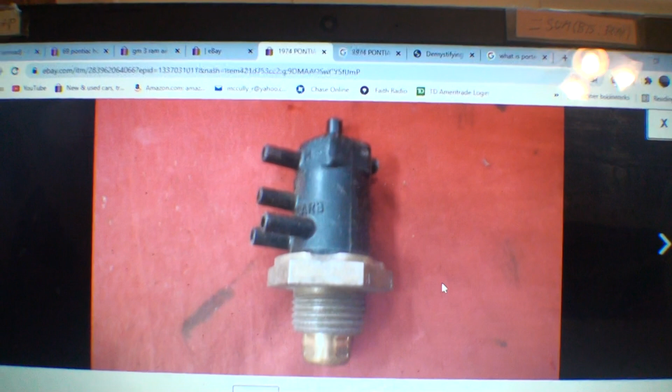Here's some more trivia. On the front of the early smog days, they had this valve right here on the front of the manifold, and it's got 4 ports. It works off vacuum, but there's also this part down here that will open and close depending on if the engine is warm or cold.

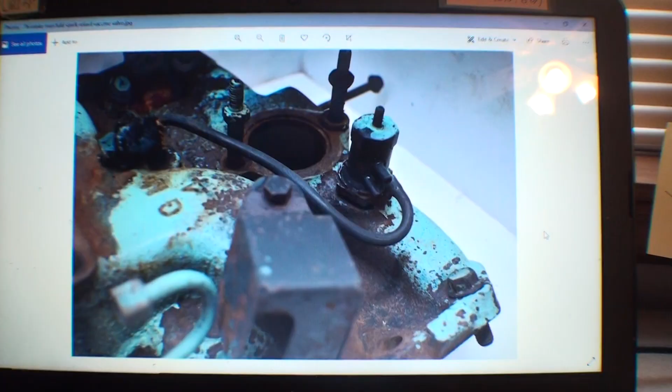Anyway, here's a picture of an old manifold I had. It's on my computer, and here's an instance of that valve.

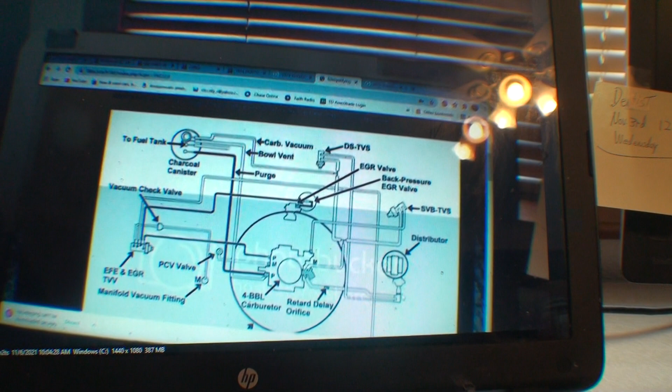I'm trying to explain to anybody that cares and put it together myself. This is shot over some time, but there's a lot of pieces, a lot of valves that are stuck into what I call smogger manifolds.

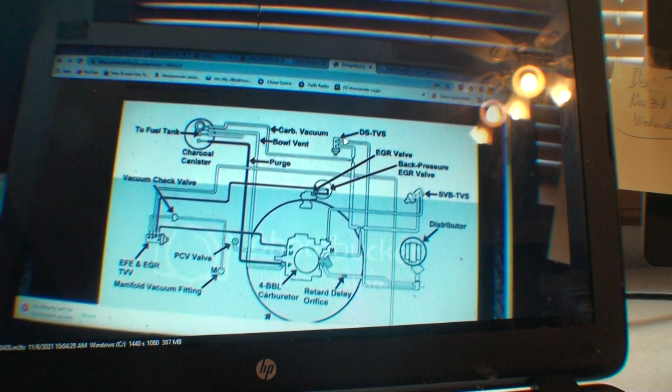Now here's the one that I showed, I think it has 4 ports. Here's another one that has 2 ports, and they go to various locations.

To clarify, this might all be out of order since I'm putting a bunch of videos together. But basically...

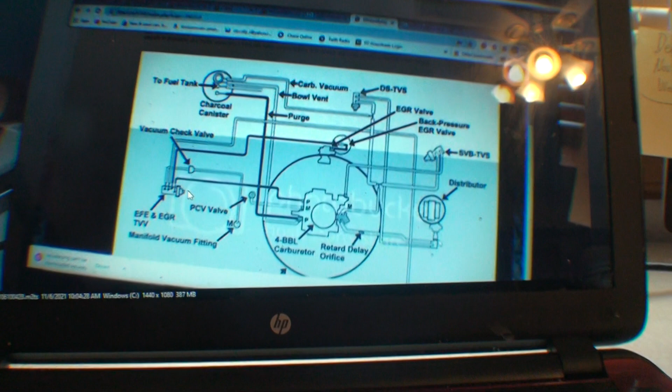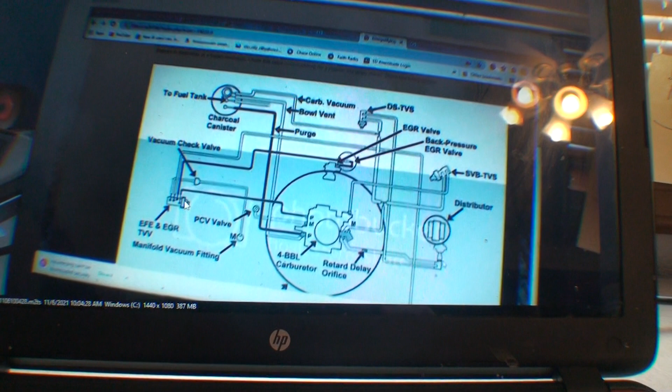The same way a thermostat works, when it gets warm, the thermostat opens and lets cool water into the engine. But when it's cold, it's not letting cold air or cold water in, because it's trying to warm up the engine. Once it gets warm, it needs to get rid of the hot water, so the valve opens.

So think of those as this. In this case, we're talking about the distributor.

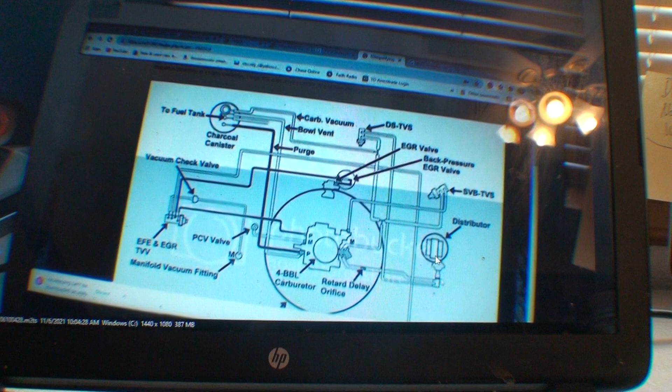I lost track of what I'm talking about, but there's actually 3 different kinds of vacuum terms that are used. I only see 2 of them here, but there's manifold vacuum and ported vacuum. There's also venturi vacuum.

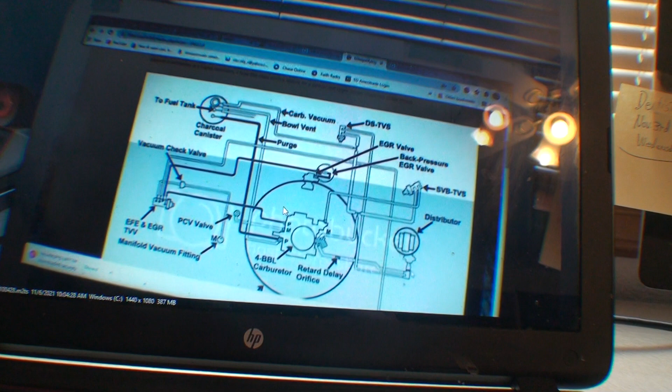Basically, when your engine's sitting still, there's no vacuum. I mean, when it's off, there's no vacuum, right? But once you start your engine, the pistons start sucking air in through the carburetor. That's what sucks the fuel in.

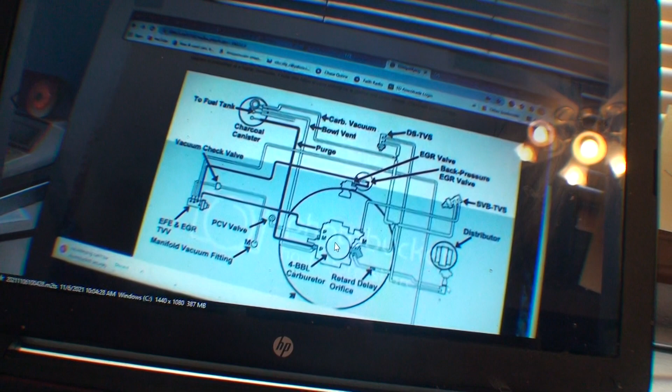It depends on how much the throttle valve is open, on how much vacuum you're going to get. Here is the throttle valve on the very bottom of the carburetor. Don't look at the picture in the background. When you step on the gas, it opens that throttle valve up.

When it opens up, it allows certain ports inside the carburetor to open to vacuum. There's little holes that go to the float valve. The float, I'm not sure how to put the term, but it allows more fuel to come in.

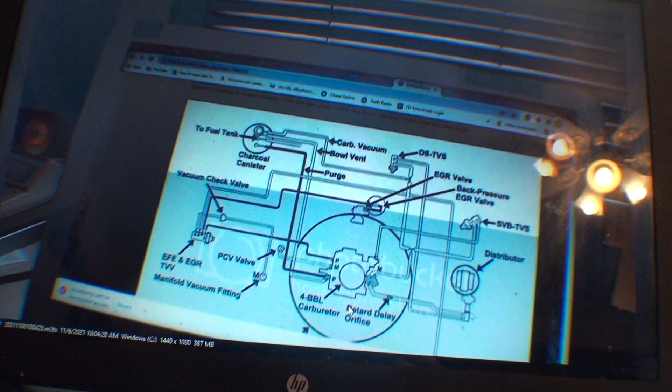You want a certain amount of fuel at idle. You want a certain amount of fuel when you're punching it. And you want a different mixture when it's cold, and a different mixture when it's hot, because cold fuel burns different than hot fuel, and that's what smog's all about.

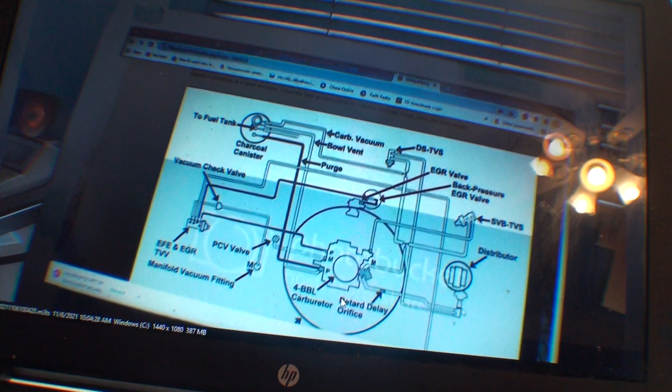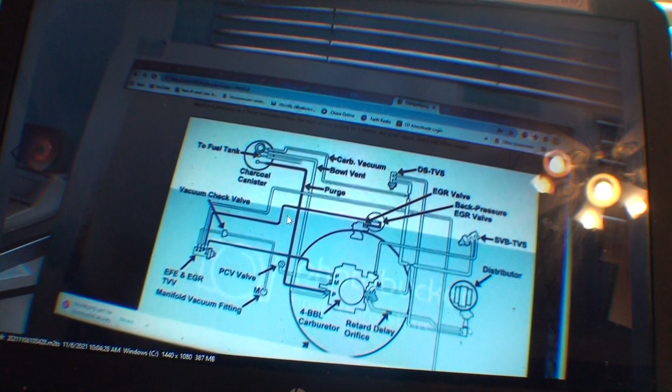Getting back to what I was trying to explain here, the chances are you get a car and these things are all disconnected, and you start wondering what all this junk is. So I'm just going to go over this one thing, and it kind of explains how all this stuff works.

So we're talking about this one. This has 2 ports. It works the same principle as the 4 barrel. If you look at this drawing, I'll do the best I can to explain it.

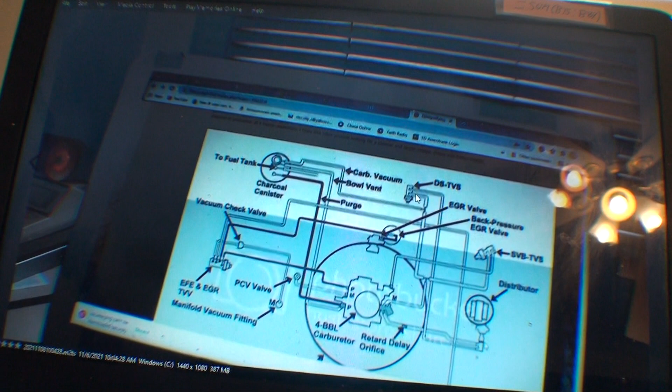It's like a thermostat, except it's not letting water come in. So there's a valve in here. When the car gets hot enough, it'll allow manifold vacuum to come up through, it'll open, and it'll go down to your distributor and activate the vacuum advance.

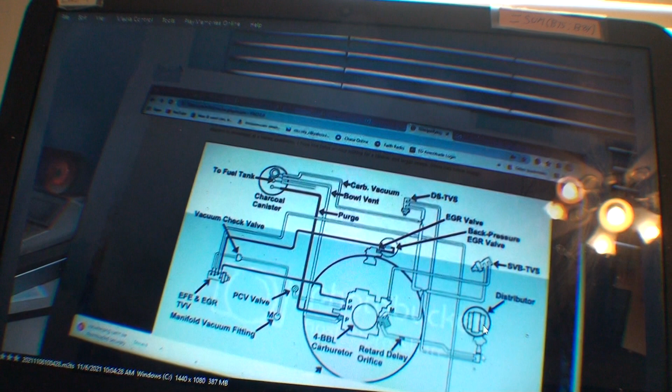Again, this is all smog stuff. But it's just, if you're wondering what all this junk is on your manifold, I think I go into it a little bit further, showing different pictures and so on.

That's how this thing works. That's how this one works. That's how this one works. That's how this one works. And look, they're all intertwined.

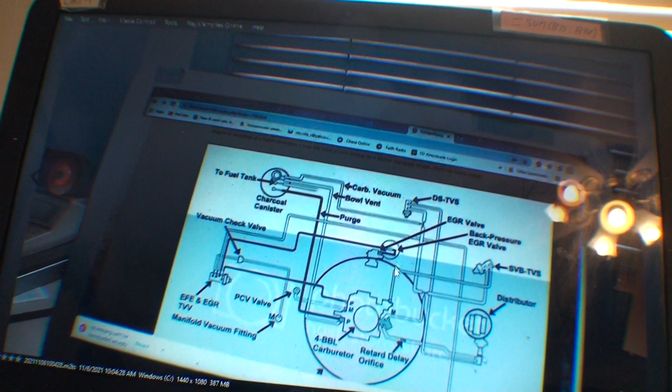But let's just go one more step further. You notice this one's manifold. Let's see if any of these go to ported. This one goes, there's one to ported. There's another one to ported.

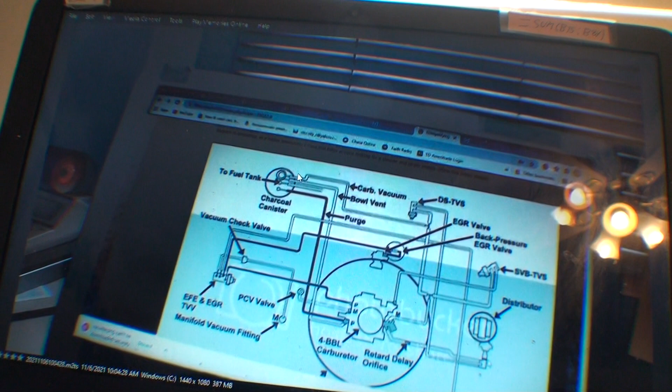Now in this case, I shouldn't be talking about all this, but then you get the charcoal canister, which is basically trying to capture unburnt fuel. I guess that's enough about that, but I think there's some more information ahead.

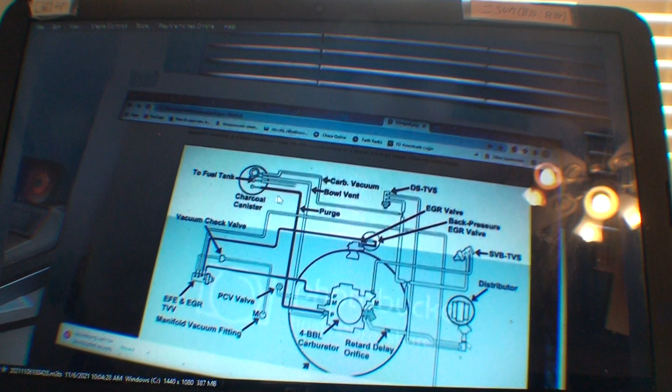But if you got a stock car, chances are you're going to see all this junk on your car.

Now I live in a county that we don't have smog checks. In Washington State, Thurston County, I don't have to have smog checks.

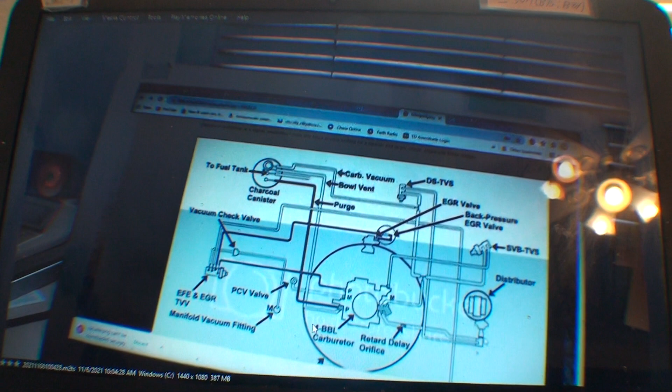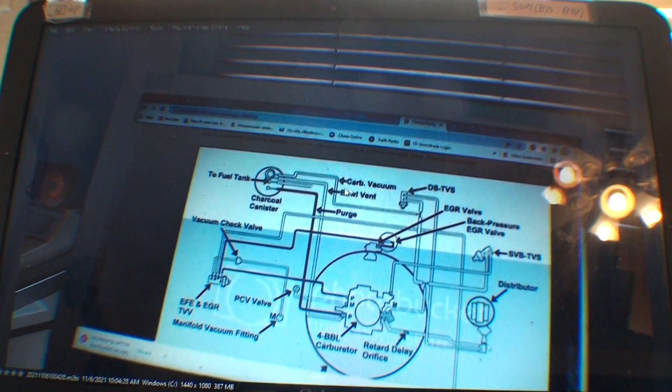If you're in a place like California, you're pretty much screwed, because more than likely on your engine bay, on the radiator support, there's a picture of what is concerned. They're going to check, they're going to say, hey, is all this stuff hooked up? And then, according to some values, they're going to hook up an emissions tester to see if the fuel's burning to the extent California allowed that year. They're not going to go to the newer standards, they're going to go to the '76 standards.

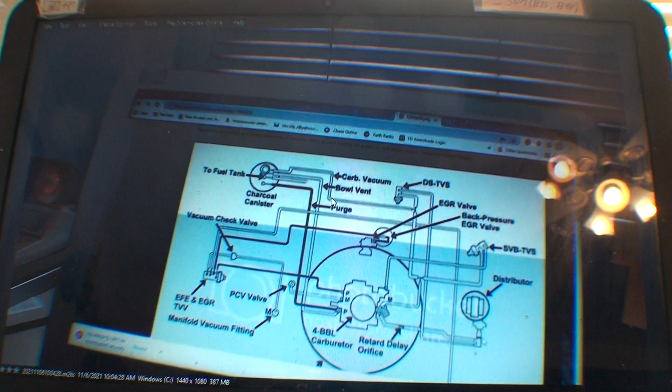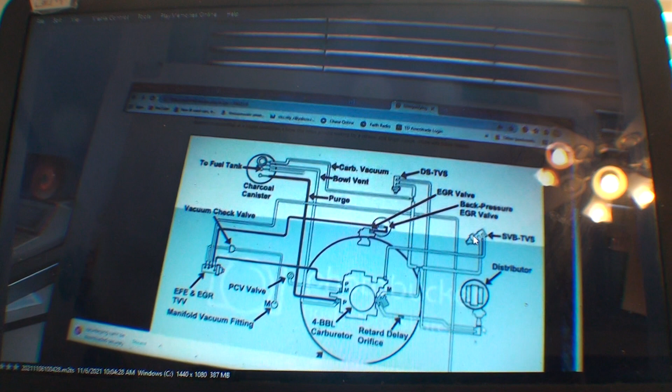So anyway, nowadays they have computerized systems, and they got rid of a lot of this junk, because you can control the smog better with a computer. You don't need to rely on vacuum, even though there might be vacuum connections. You're relying on other types of systems. In a nutshell, that's what I'm trying to say.

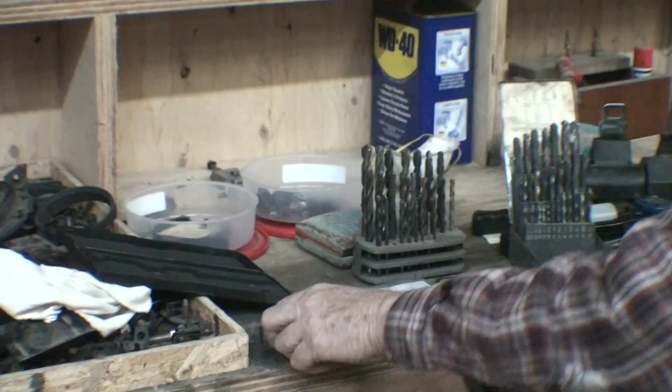So I don't know if you can see this, but I got, again, we're going back to the rivets to hold the window trim on, and I need to put them in. I got two different kinds, I got the rivet kind and I got the screw kind. So this is going to be my next video. It's 3:45 in the afternoon, I didn't come down here early. So anyway, the first one says...

Use the 7/64 drill bit. Well, you know, it says 7/64 here, but that doesn't mean it is. It actually says 'and no larger.' So I think I pulled one out already, let me just double check.

So this reads in fractions, decimals, and millimeters. That is 3/32, so that'll work for the screw type. I'll put that on top of it. And the 7/64, then you can zero it, so 0, then fractions, 7/64.

Yeah, so I'm getting old, I can't see. So I got this magnifying glass in front of the wheel.

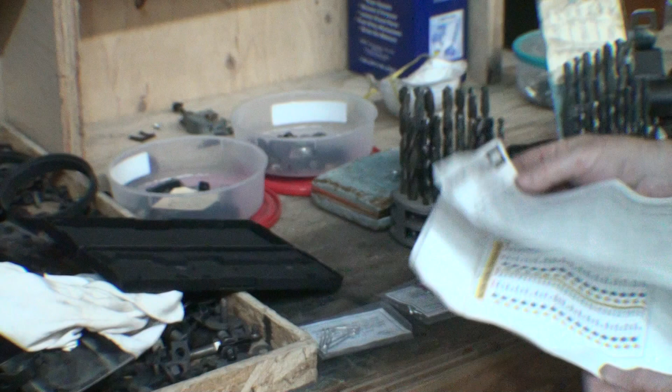I don't know if anybody's interested, but I got these offline. Like I say, sometimes when I use this it's in between and I don't know what it means, so I just look at this chart. Well, for one thing, this first one shows what size drill bit for what size tap hole.

This is a fractional decimal conversion chart. So if I put this on decimal and zero it out, let's just see how good it works. It says 0.107. So the closest one is 0.109, that's 7/64. The next lowest is 0.093, and the next highest is 0.125.

So anyway, that's like, I'm just throwing a little piece of trivia here. You see this right here?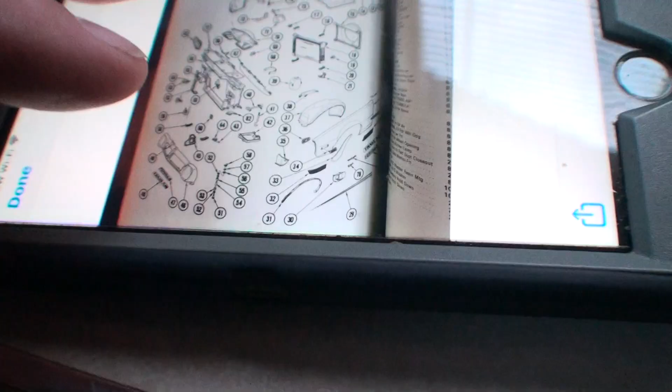I've been wondering, and I'll show you the detail on the diagram, but see, there's no flares, that's an air dam, that's different than other cars. See where it curves in and ends right there? And I've been wondering what that part is right there - part 67. There it is. Just a piece of trivia.

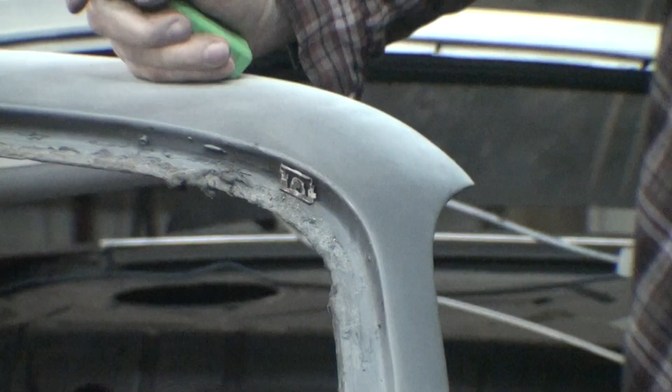You know, like I said, I don't work on cars all the time. This is just a car for fun. But I always wondered how these clips snap onto here.

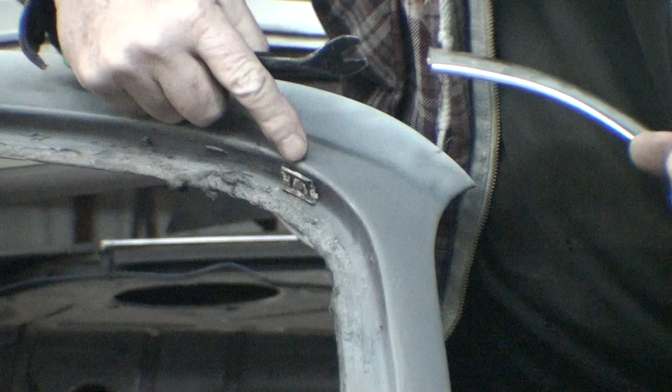But if you think about it, if I put it here, you know, you're flush up here, so the bottom has nothing to do with it. It's this top piece right here, it snaps into that lip, you can see that. So when I push it down, it's going to snap in and lock into that lip.

I don't have the right tool to take it off, but watch this, let me see. See, it's way up because of the glass and the other stuff, so I just need to reach in and push that thing back, but I don't have the right tool, but I can just go like this.

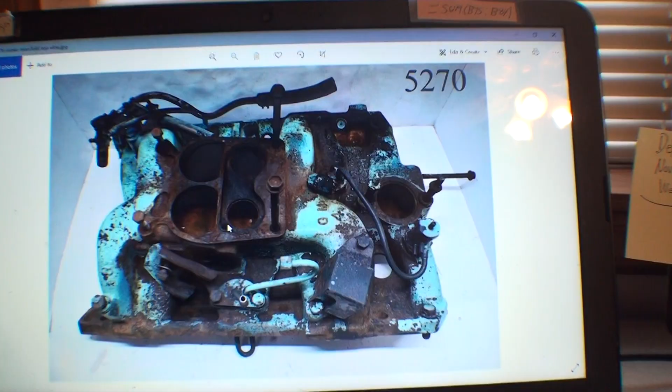Anyway, that piece slips into that lip. I just thought I'd share that because see this little hole right here? That's the choke. So when the choke is enriching or not enriching, I guess I don't know the other term, right into this port.

Now, I guess the point I'm making, this is more, this is a Smogger manifold, so I switched mine to a '74, and then I'm going to put an electronic choke. But another thing, these get plugged up a lot with soot, so your choke might not even work.

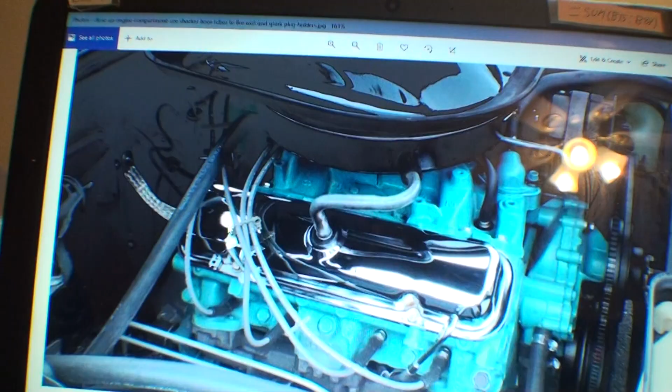If you have that problem and you're in this year, take your carburetor off and clean that out. You can see right here, I touched upon this last time when I was searching through my parts. That is the factory spark plug loom connector. Let me see if I can zoom in on that.

So I think earlier in this video, I can't remember because this is over a couple days, there's two different kinds of dams. I think I called it part 47 or something in an earlier video, or 57. That's not this dam. Remember, that one went round.

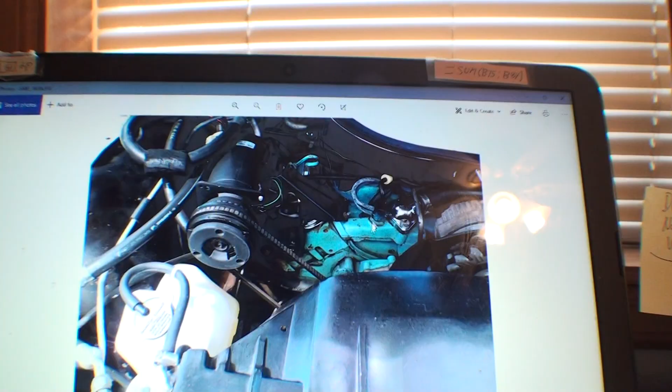Yeah, there's another shot of that car, that vacuum I was talking about, that valve. So let me see if I can make it bigger. They're at different heights.

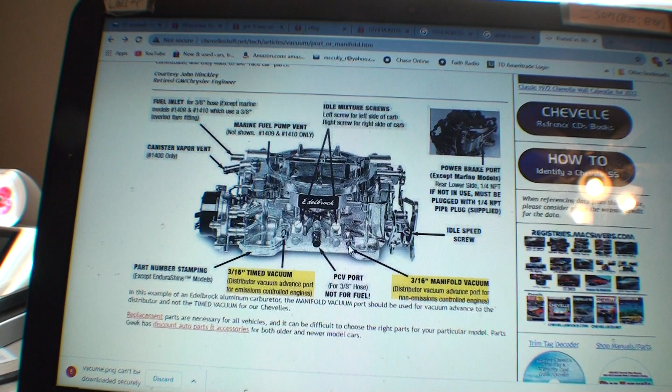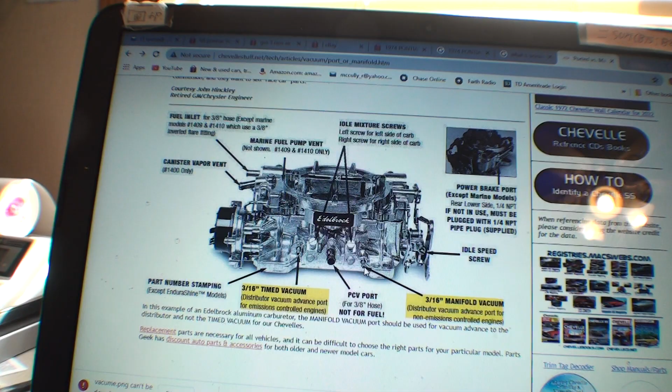So in this case, they call this 3/16 manifold vacuum. That's the lowest one on this carburetor. So I bet you if you were to flip this carburetor over, there'd be a hole directly straight down into the manifold. This is to get a leaner mix.

Leaner means less emissions. You know, when you see a rich car, I don't know, but it's young - I mean, in the old days, you'd see cars with black smoke coming out the back. That's a rich mixture that's not burning.

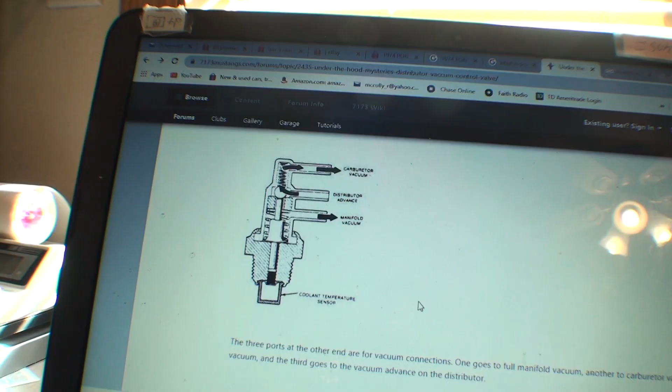But anyway, if you're interested in this article, it's at chevelstuff.net. Here's a picture of that valve, a side view, a cutaway. So just to make it clear, it's screwed into your manifold, but there's not actually a hole into the manifold. There's just a sensor that opens kind of like a thermostat.

So below that is manifold vacuum. So if you look at these three gauges here, again, this is all smog and air related information that I'm trying to give, and then I'll read a little bit below.

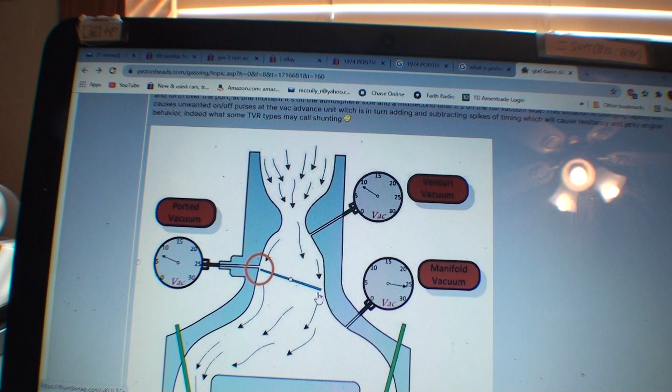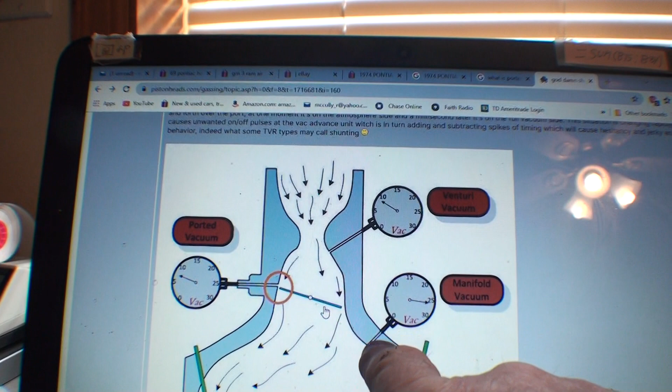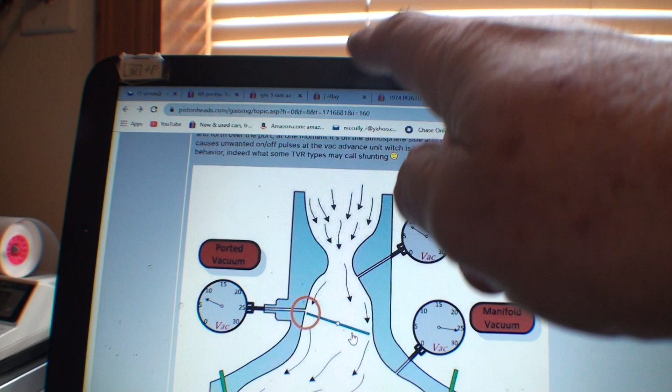But if you notice, this valve, this butterfly is just starting to open, but you notice that the manifold vacuum, it's 25. Again, this is just an example. As the butterfly starts opening, even though it's 25 down here, it's like 7 right there. But up in the venturi, it's a little bit higher because it's speeding up. Again, the vacuum is sucking air into the carburetor.

Okay, some more trivia. In one of my early videos, I show that I went to the Trans Am, or Pontiac Firebird Graveyard, where the guy had a bunch of exhaust manifolds. I picked this up for $60. This is what they used in the early days.

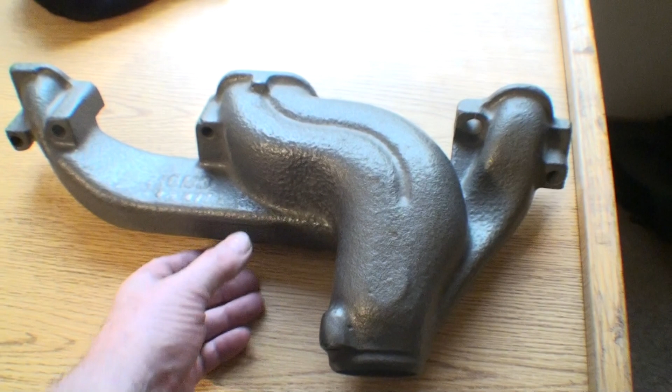You notice they're big ports. So a stock exhaust manifold is just, they're smaller, they're tight. But what I don't like about this, it's got 1, 2, 3, that bolt is missing, 4 or 5 holes. But anyway, the numbers are worn off right here, but this is a GM3.

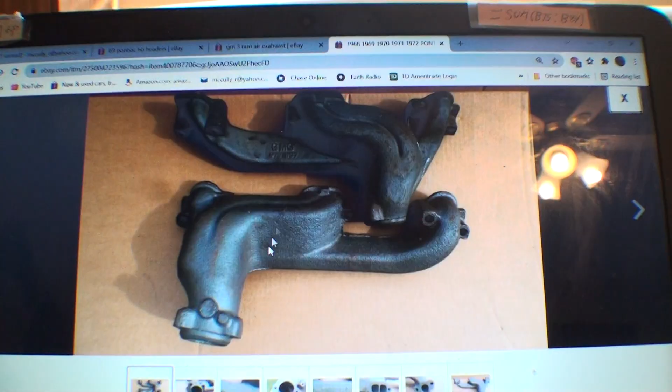So there's a left and a right. And if you notice, there's 1, 2, 3, 4 holes on this one. There's 1, 2, 3, 4 holes on this one.

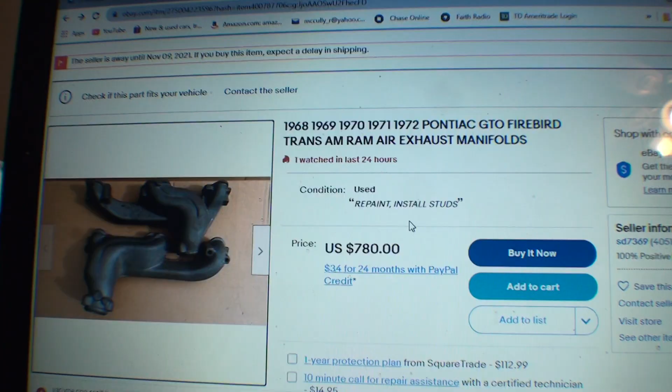These were the, I'm not sure what year Smog started. See, I had a '69 Roadrunner. I had something, I can't remember what it was. There was hardly anything. But basically, this is the other end of the vacuum.

This is getting rid of all the exhaust. So basically, they're kind of like fighting each other. One end of the Smog is trying to restrict the mixture. This one is trying to get rid of it fast. The bigger the ports, the easier the flow, the faster it gets rid of it.